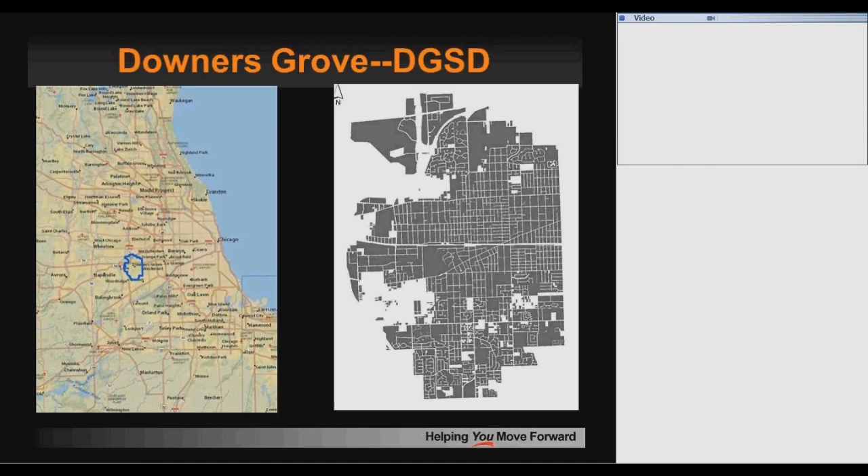The Downers Grove Sanitary District is located about 30 miles west of Chicago. We're a special unit of local government, and our service area covers 20 square miles and serves roughly 80,000 people. Our weather conditions are typical for the Midwest.

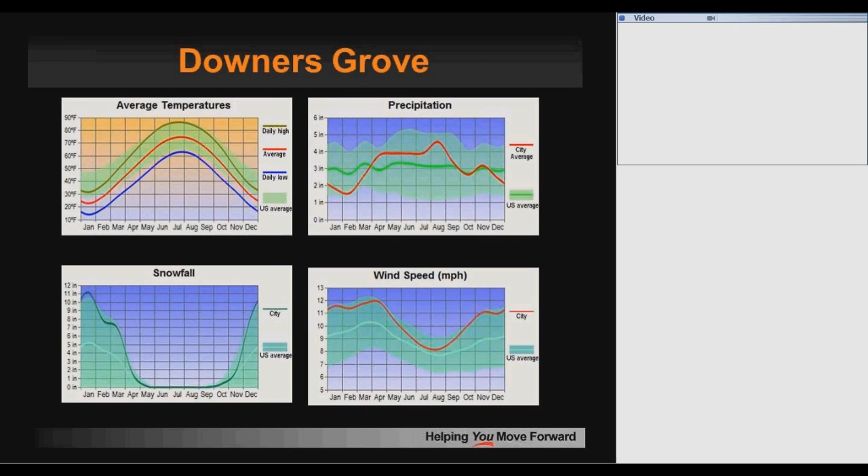The district is responsible for the collection and treatment of wastewater from several different communities. We cover most of Downers Grove as well as a few of the surrounding communities. We do operate our own treatment plant that's designed for 11 million gallons a day.

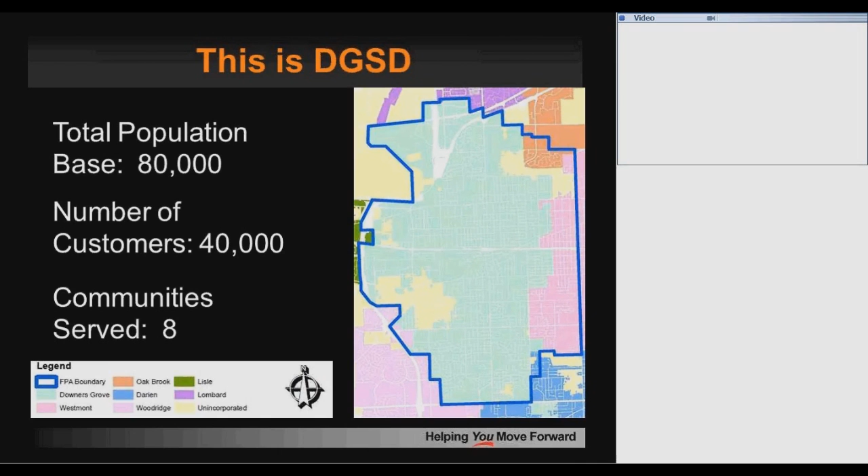The Downers Grove Sanitary District operates and maintains 9 lift stations. We have 252 miles of sewer that is predominantly 8-inch vitrified clay pipe. The system has an average age of 49 to 50 years. The oldest pipes are 109 years old and typically bedded in clay.

We do have an ongoing in-house maintenance program to clean and televise the system. We clean over a quarter of the system annually and televise about 10%.

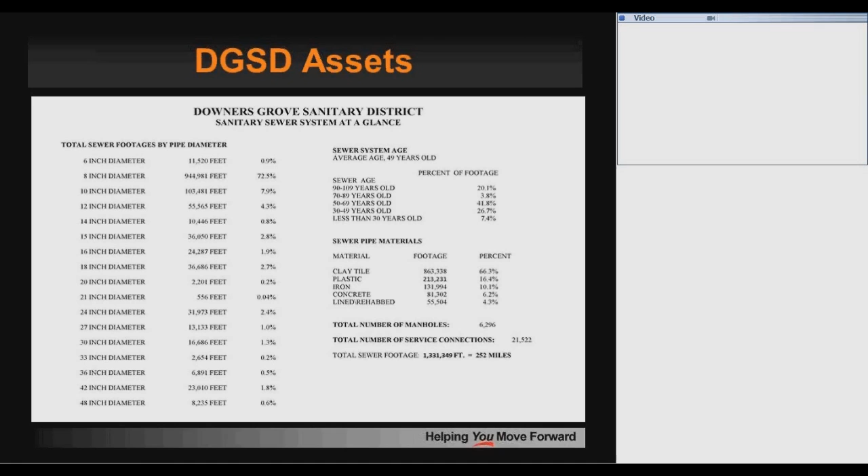As a result of our efforts to upgrade the system and eliminate inflow and infiltration, we have a long history of applying many different technologies in our rehab and replacement programs. In the 80s, just for some background, we did several open cut replacement and lining projects, and they didn't show a lot of improvement as far as the reduction of I&I.

In the 90s and 2000s, we continued with some large-scale rehabilitation projects in an effort to prolong asset life and reduce inflow and infiltration. These projects included grouting that was done on large and small diameter sewers. The metering data, because we do flow meter, the metering data after these projects definitely showed a reduction in I&I.

I think we have a good handle on the extent of I&I because we do have an ongoing flow metering program that we've had in place for several years. So we are able to gauge how well our mitigation efforts are working.

It's because of this metering program and because of our in-house cleaning and televising program that we already had areas identified where there were no significant structural problems and where our flow metering had shown high I&I numbers. So when the ARRA funding came along, we already had a list of several areas that were really good candidates for some preventative maintenance grouting.

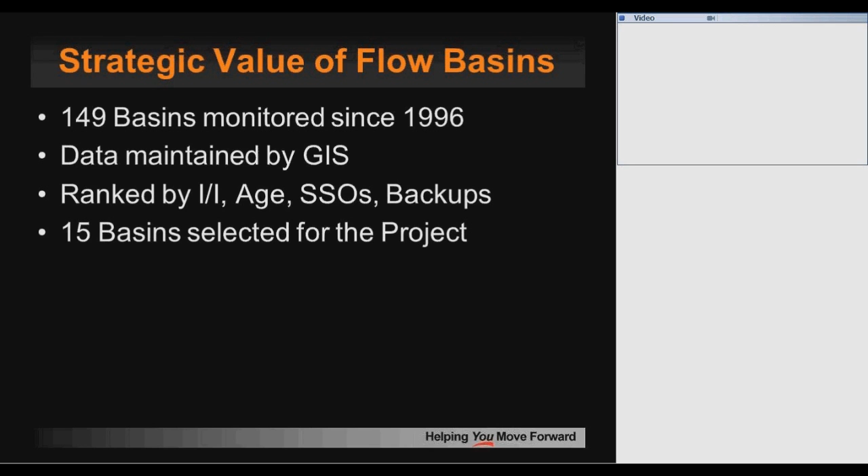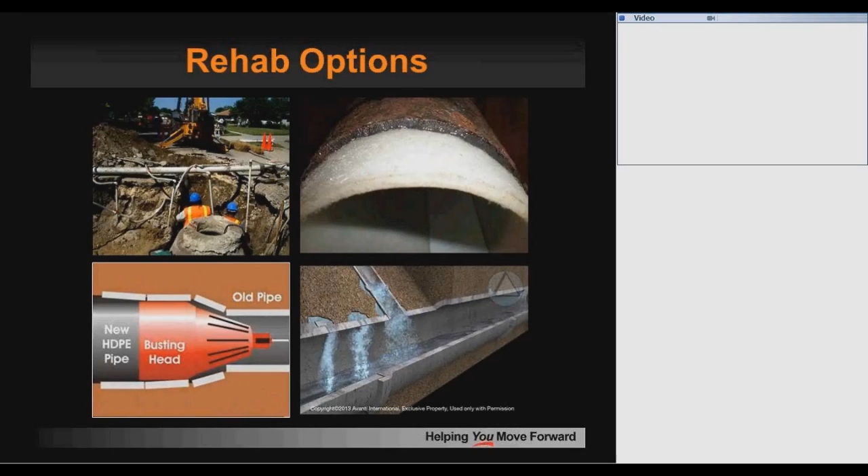Over the years, the district has used a number of rehabilitation methods with varying degrees of success, including open cut replacement, cured in place pipe, pipe bursting, and grouting. For the project we're discussing today, the district and engineers chose chemical grout as the most cost-effective method to achieve the previously discussed goals.

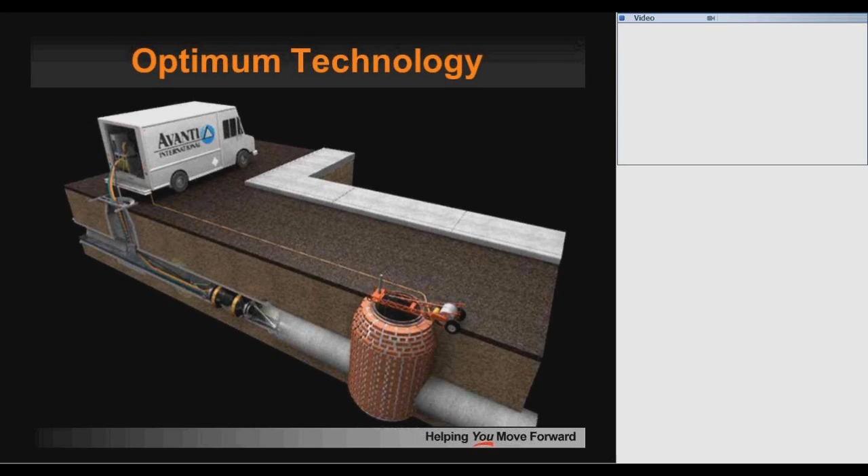The district did a major project in the late 1990s where they sealed a number of joints on a trunk sewer line. We went back 5 years later, and 97% of those joints passed. So we're very confident in the longevity of the pipe sealing and grouting.

Funding for the project was obtained through the Economic Stimulus Package, the American Recovery and Reinvestment Act of 2009. A loan was secured from the Illinois EPA at a rate of 0% interest with a 25% grant. Because of these loan terms, the competition was great, and the project had to be shovel-ready. In addition, the Illinois EPA had to approve grouting as a permanent rehabilitation solution.

I'd like to finish by touching on the specifications for the project. First, the contractor was required to clean and televise the sewers prior to grouting to confirm there were no structural deficiencies. The sewers were then grouted with an acrylamide grout complying with ASTM F2304. The joints were tested after grouting to confirm they held pressure and no longer leaked.

What's unique to this project is that, in addition to testing during the grouting project, the specifications also called for a test after a 3-year warranty period, covering all joints and lateral connections within a test area of approximately 15% of the lineal feet in the original project. If the failure rate in that test area is 5% or more of the joints, an additional equivalent-sized test area will be retested, and that warranty work will happen next spring.

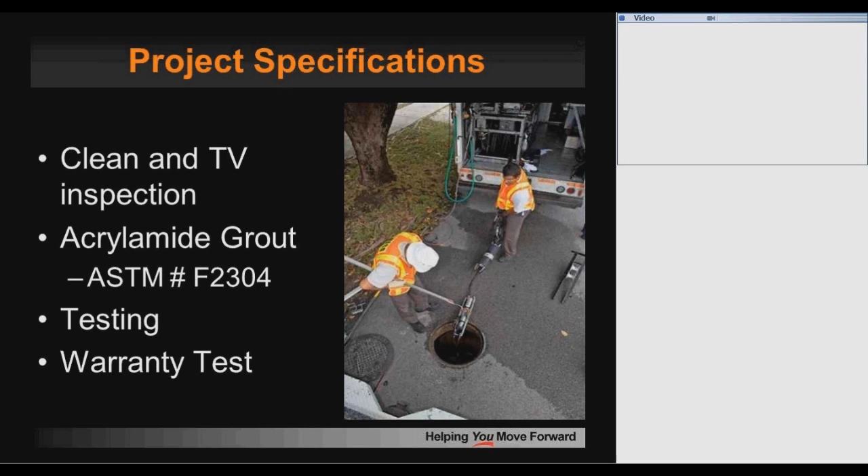So with that, I'd like to turn it over to John from National Power Rodding.

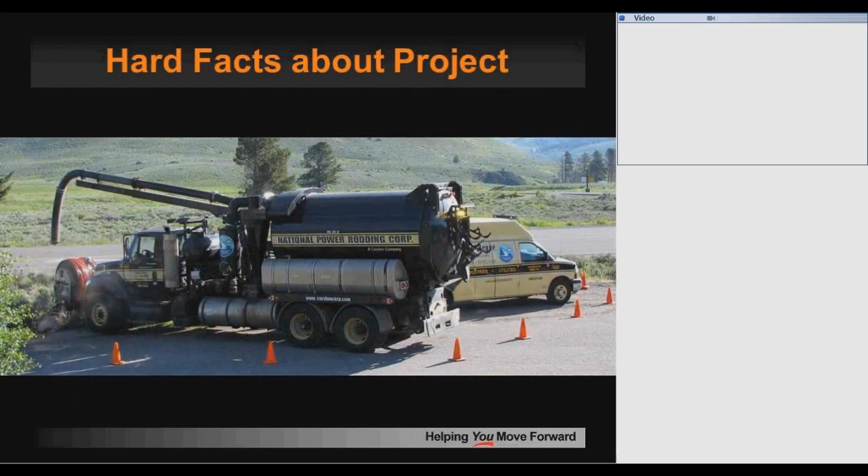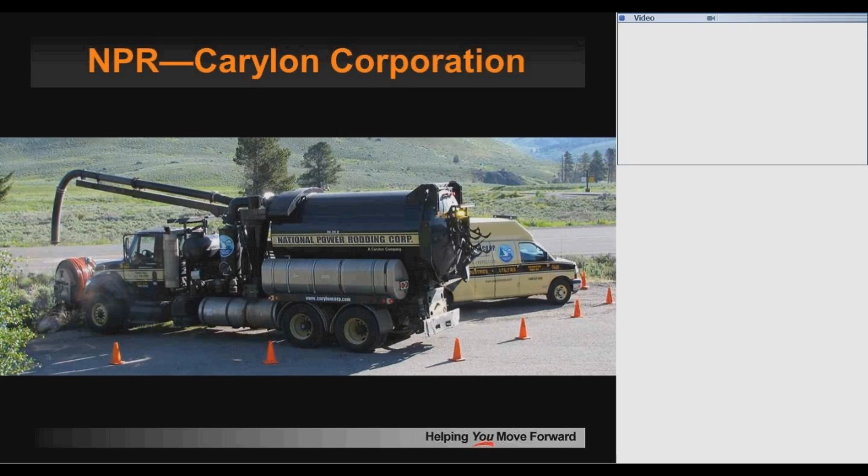Thanks, Derrick. Just a little bit about National Power Rodding. We're part of the Carylon Corporation, headquartered in Chicago and established in 1949. We pioneered the use of chemical grout for sealing sewers. Today, we are still the nation's largest chemical grouting group, serving every state in the U.S.

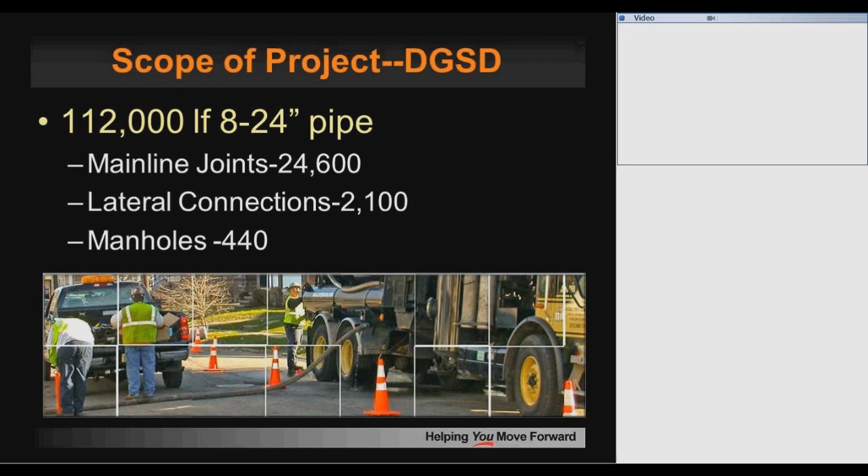The Downers Grove Sanitary District ARRA project covered a total of 112,000 lineal feet in non-lined 8-inch through 24-inch pipe located in 15 separate sanitary basins. There were a total of 24,600 mainline joints tested, 2,100 lateral connections tested, and 440 manholes to be sealed.

The project began in December 2009 and ran consecutively for 8 months, completing in August 2010. We kept a total of 3 grouting crews on site throughout the project, moving systematically from north to south, keeping all 3 crews within the same basin until it was complete. This allowed the district to only need 1 inspector on site to cover all the crews for the length of the entire project.

All of the lines were cleaned and televised prior to grouting. After televising, the crew determined if the lines were in good structural condition and a good candidate for grouting. Also before grouting, we removed all roots, mineral deposits, and any protruding taps.

Of the 24,000 mainline joints tested, we had a failure rate of 25%. Each joint that failed took an average of 3 gallons to seal. With the presence of roots in many of the lines seen in the pre-televising stage, we added a root-killing additive to our grout in order to prevent them from coming back.

We also came across an area that at one time was a swampy area. The pipe had 2-foot joints, and virtually every joint failed. For this area, we added a diatomaceous earth additive to the grout in order to give it a heavier consistency.

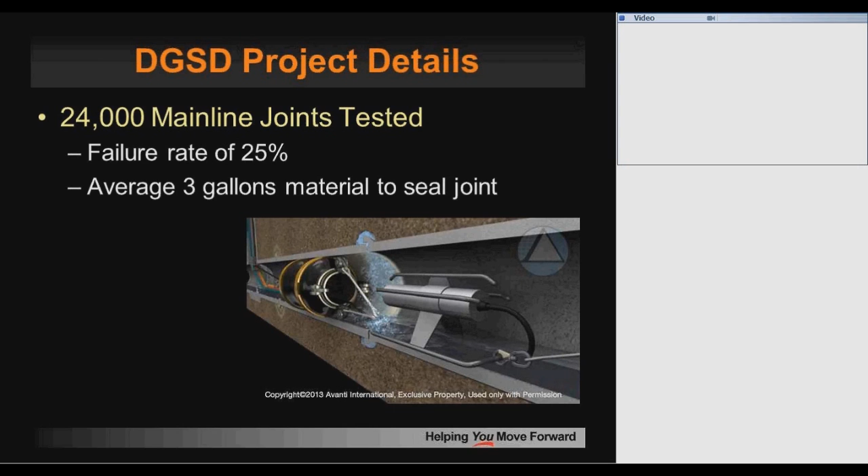Of the 2,100 lateral connections tested, we had a failure rate of 60%. We used a 4-foot sock to test and seal not only the joint at the main line, but also the first 2 to 3 joints of the lateral. Each failed lateral took an average of 3 gallons to seal.

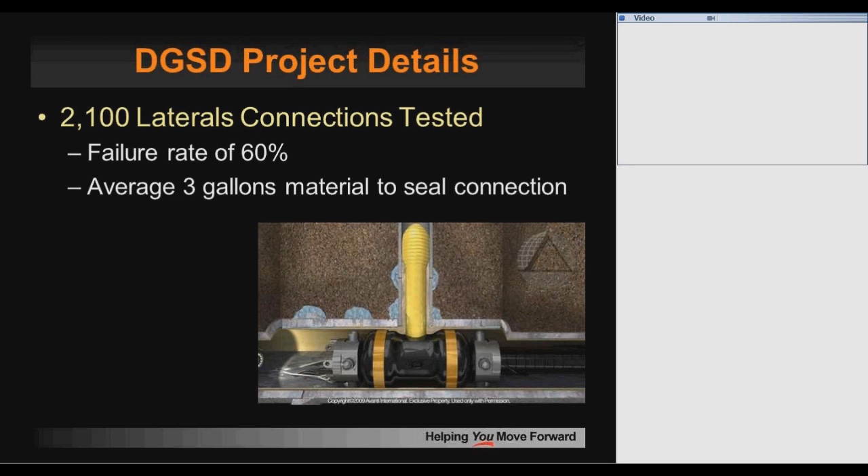The project initially bid having 440 manholes to be sealed by creating a grout curtain around the structure. Once we got into the project, we quickly realized that the ground around the manhole was not ideal for grouting. Because they used a large rock for the backfill, the manholes were taking an extensive amount of grout to create that curtain. Not being very cost effective, we suggested switching to a concrete liner.

There were also 6,200 lineal feet of 24-inch concrete sewer line that had extensive hydrogen sulfide damage. The operators saw this during the pre-televising stage, and after reviewing the video, the engineers and the district agreed that this particular pipe would be better suited to be lined than grouted. It was taken off the project and then later bid as a cured-in-place project.

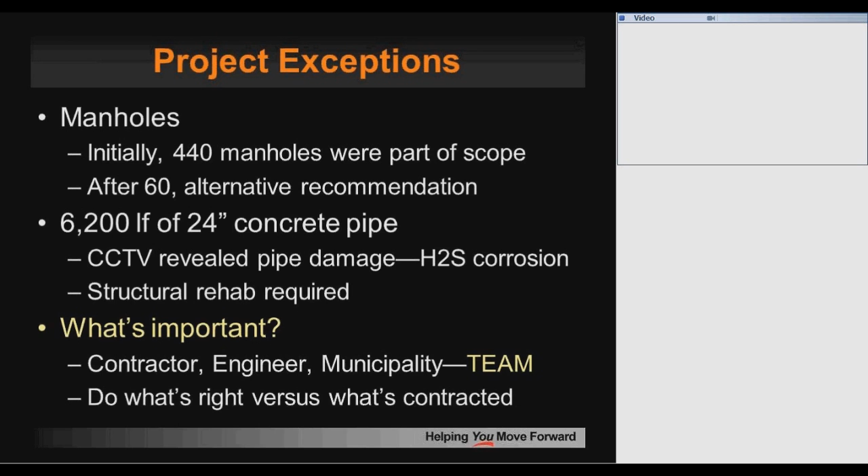The important thing to remember is this: whenever you work on a project, the engineer, the owner, and the contractor should act as one team with one goal, and that is to produce the best results. While the contract may be only set for one item, another solution may be best. Cooperation and teamwork will win every single time. And with that, I'm going to turn it over to Frank.

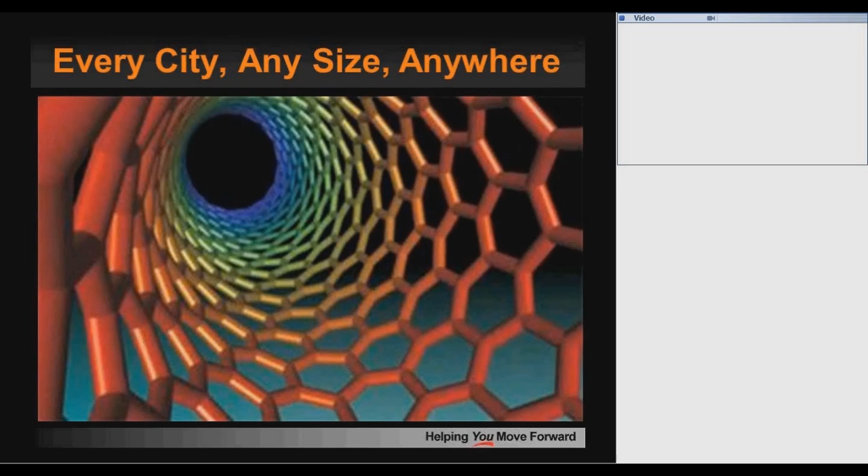Thank you, John. I will be discussing today how the utility and storm trench systems impact sewer infiltration in every city of any size and in every part of the country, and how they are interconnected in some way.

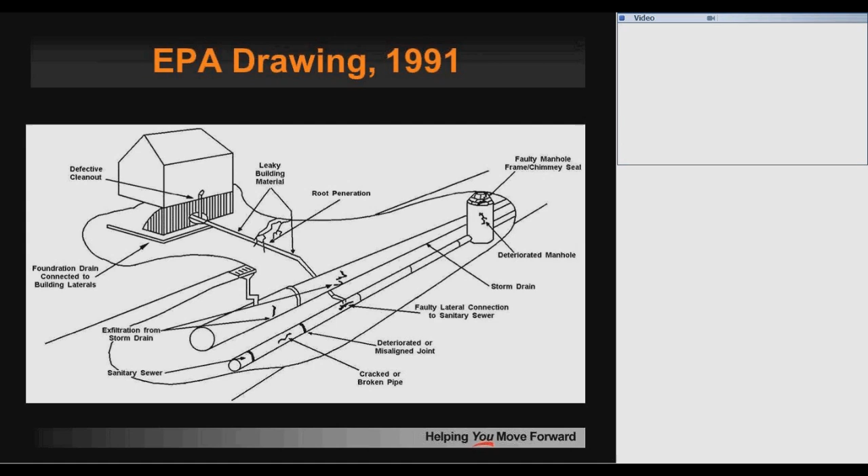What you're seeing now is an EPA drawing that you might have seen before, and it's just showing the complex nature of our underground systems. Here's a more up-to-date cutaway image of what an underground system may look like today. Similar points of infiltration: you have your trench water, you have your faulty manholes, you have your leaking sewer joints, you have root penetration, you have leaking service laterals.

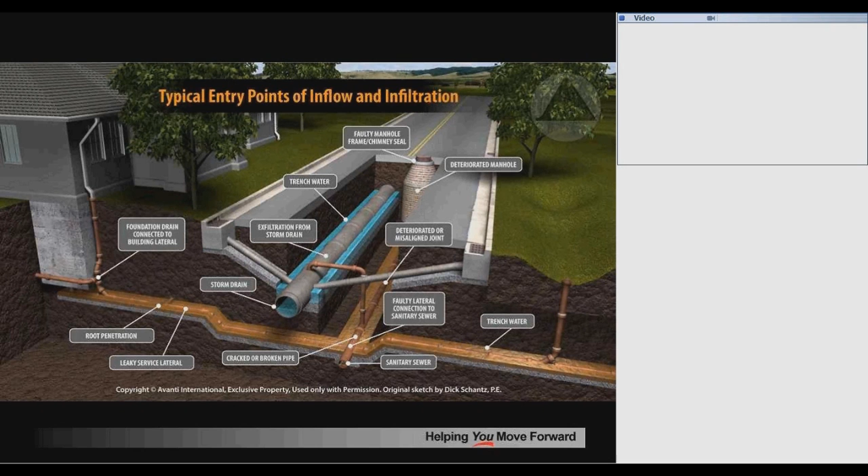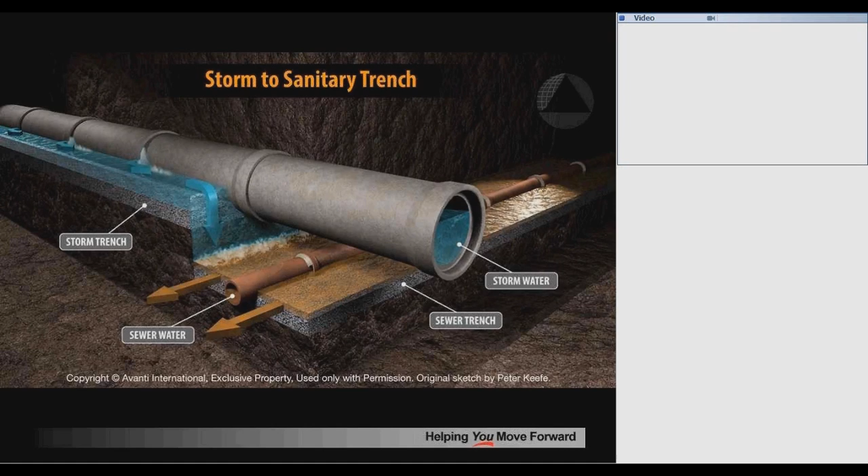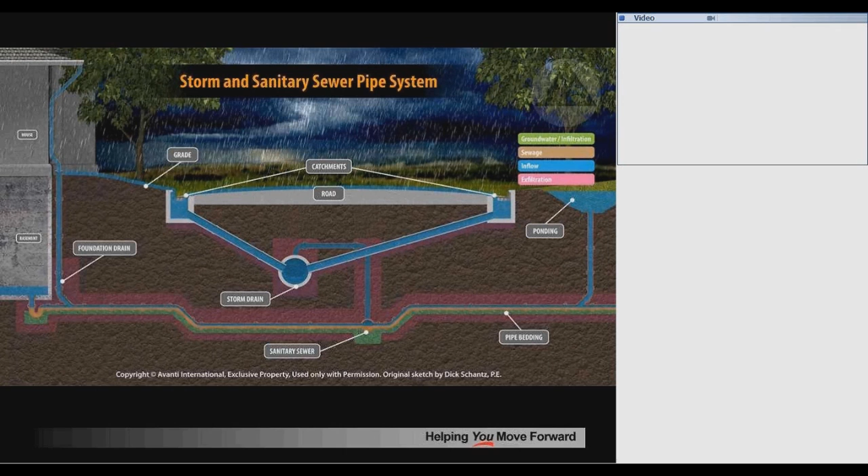Once the water level in the storm and sewer system rises, there's increased water head pressure. The increased water head pressure drives exfiltration from both storm and sanitary systems to open cracks, joints, connections, and manholes. When the system gets surcharged, this begins to break down the bedding soil, which is the fines and sediment that you find during pipe inspection. As more fines are lost, there is a more destabilizing soil environment for the pipe. The pipe begins to move, the pipes begin to lose alignment, and then the joints break open.

Here we have the underground water image. You see the draining down effect. These channels have developed over time, moving water to its lowest level. If the storm continues, both the sanitary pipe and trench system become surcharged. The increased water head pressure just drives more water into the pipe trenches.

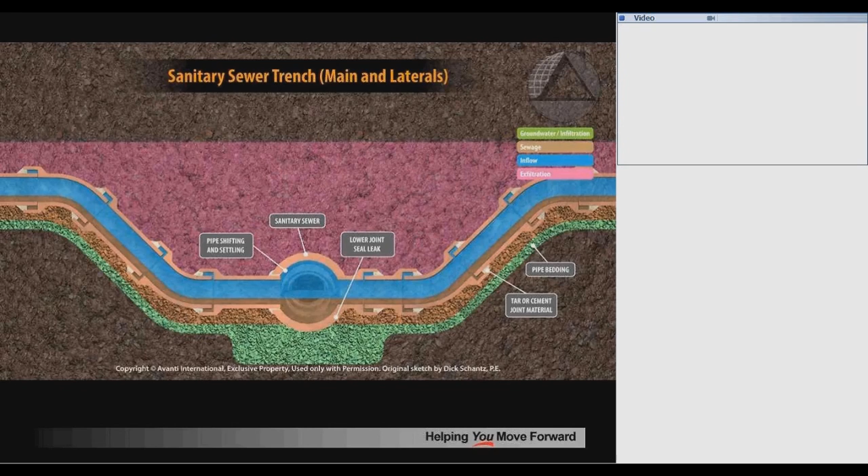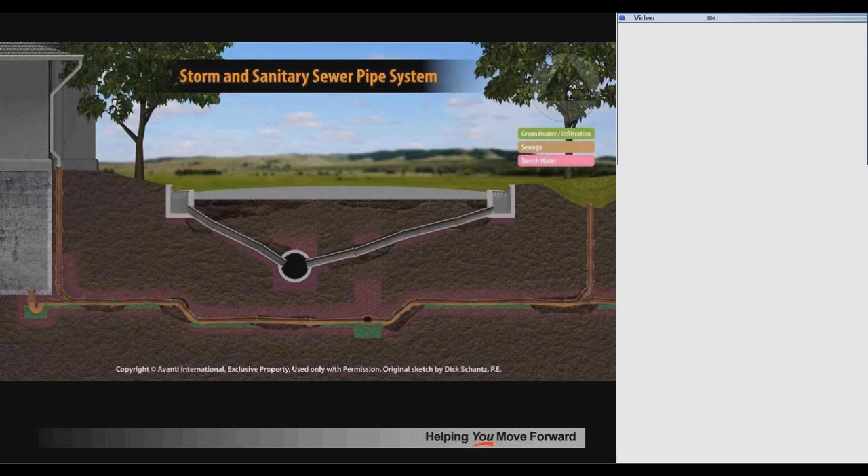So after the storm stops, the water begins to drain from the system, but over time you've lost bedding soil around the pipes and structures. These problems do not occur overnight. It has taken years to develop these underground conditions. From the very first rain event, these underground channels continue to wash away soil. As this continues, more soil and bedding support is removed, further destabilizing your underground structures. And as this scenario worsens, you begin to see how the underground support system of pipes and structures is weakened.

The next slide shows an example of a worst-case scenario, and this is sometimes the first evidence that you have an underground problem. Out of sight, out of mind is a real problem when it comes to our underground structures.

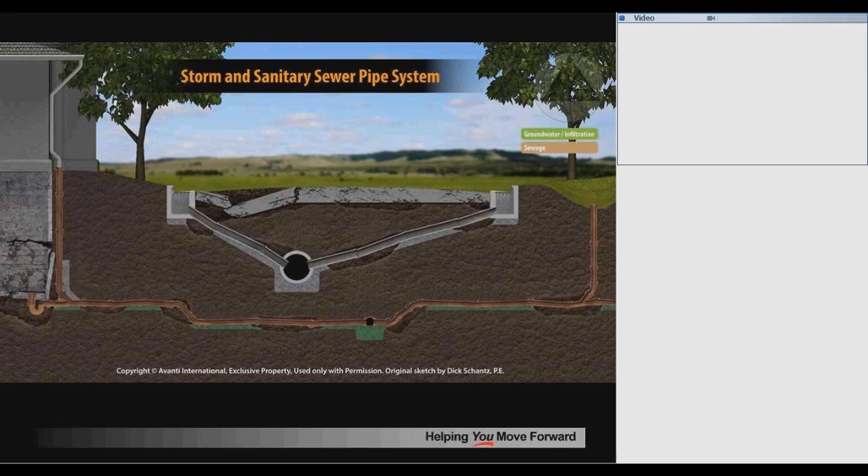We did not create this problem, but we have inherited it. What's our role as engineers, as contractors, as decision makers? We can dig and replace the aged infrastructure, but it's not really feasible for most municipalities. Rehabbing structurally sound pipe is the best option. Today we have a number of choices, but making the correct one is crucial.

You can pipe burst, you can CIPP, you can line. These are all important technologies and all have two things in common: they are all structural repairs and for the most part require a dry environment before being installed. Chemical grouting, the only non-structural repair on this list, is in fact a complementary technology for all these alternatives and the only technology specifically designed to stop infiltration. These other technologies do not stop infiltration.

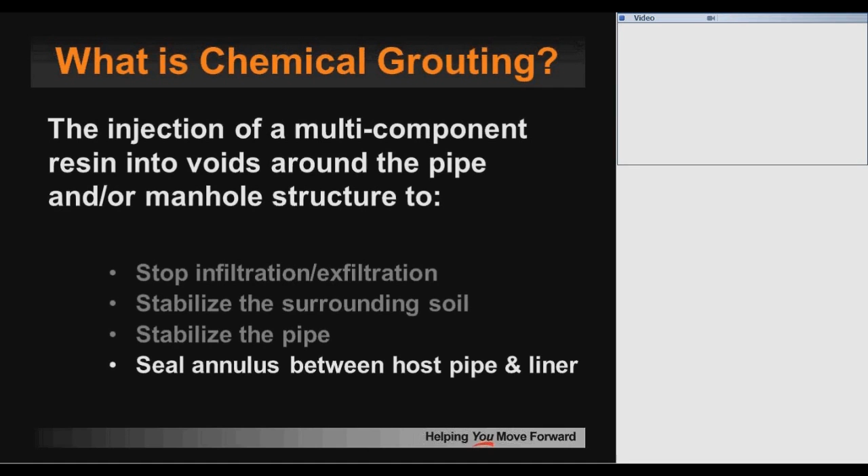Chemical grouting is a pressure injection of a plural component resin into the soil to stop I&I while stabilizing the soil around the structure. If there is one image that you take from this presentation, it is the various stages of pipe decay. At stage 1 and 2, chemical grout can extend the life of our system. But at stage 3, we're faced with making structural repairs, which can be anywhere between 3 and 10 times the cost of proactively maintaining and sealing our entire system with chemical grout to stop I&I.

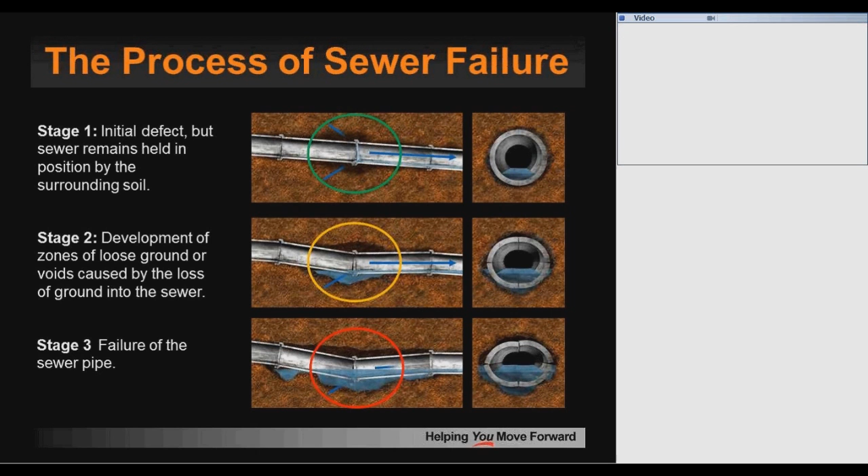And with that, I'll hand off to Robert.

Thank you. I already have our first question here, and I think it's probably best to pass that off to John Manijak. Possibly Bob or Derrick may want to pitch in on this.

And the question is, was the cost of the warranty requirement inclusive to grouting costs or a separate bid item? And if so, how much did the additional warranty testing cost?

Well, it was an additional item. It was an option that was available to the district if they wanted us to come back and retest. I know that the price to retest was fairly low compared to the rest of the project itself. I don't know if Bob knew the number, but the testing itself can be worked into the original pricing, or it can be a separate item.

I don't remember the amount, John. I don't recall it, but I know that it was a separate line item at a set amount, and it's based on the passing of the percentage that Derrick mentioned. And if that's not achieved, then it goes to additional testing, I believe, for no additional cost until you achieve, I think it was 5%, less than 5% failure.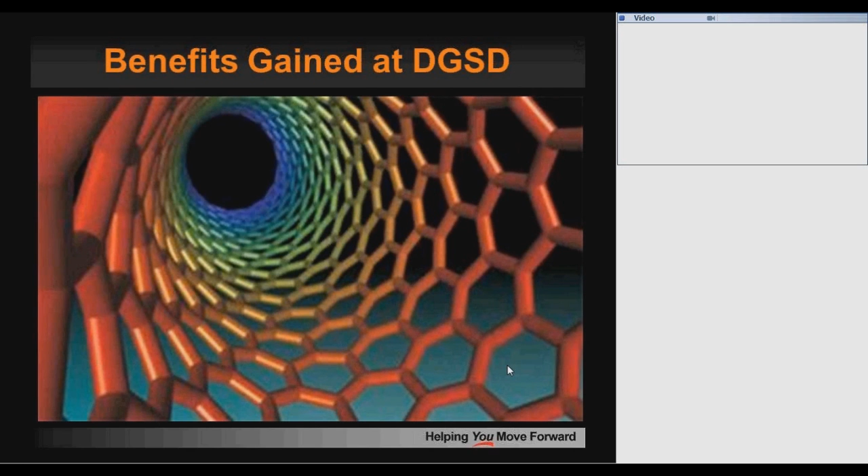And now we'll move on to Derrick, who's going to talk about benefits. Yeah, thanks, Robert. I would just like to take a couple minutes and discuss the benefits of the project at Downers Grove Sanitary District. So first, the question that probably everyone has is, how much I&I was reduced by the grouting project? As mentioned, the district has extensive flow monitoring data over the past 15 years, and using the post-rehabilitation flow meter data, we can confidently say that the peak flows were reduced by an average of 21%.

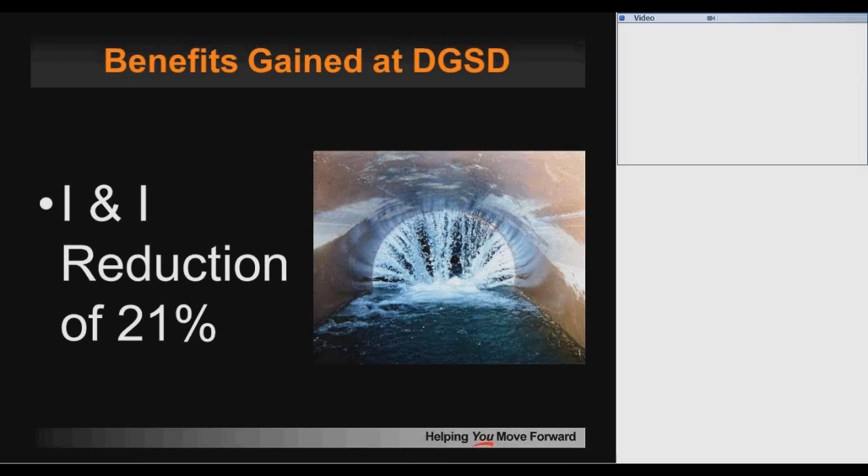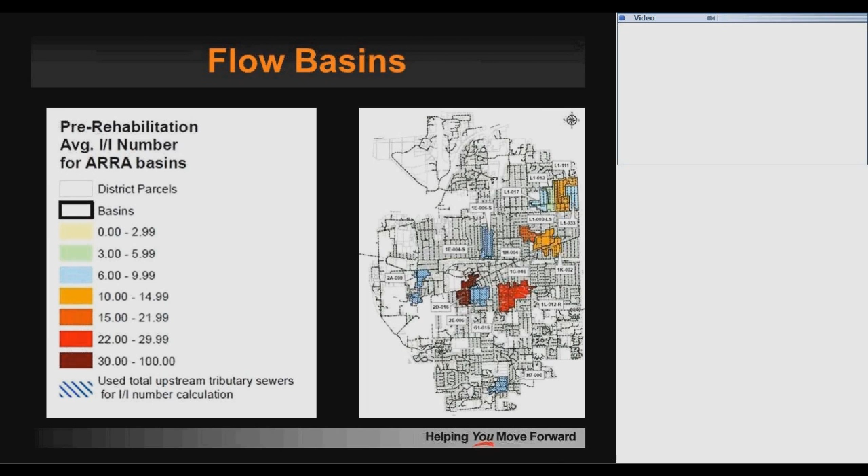So the next figure here is that map that we saw earlier. As a refresher, it shows the severity of I&I in each basin, with the darker shaded basins receiving more I&I than the lighter shaded basins. The data prior to rehabilitation is shown on this figure.

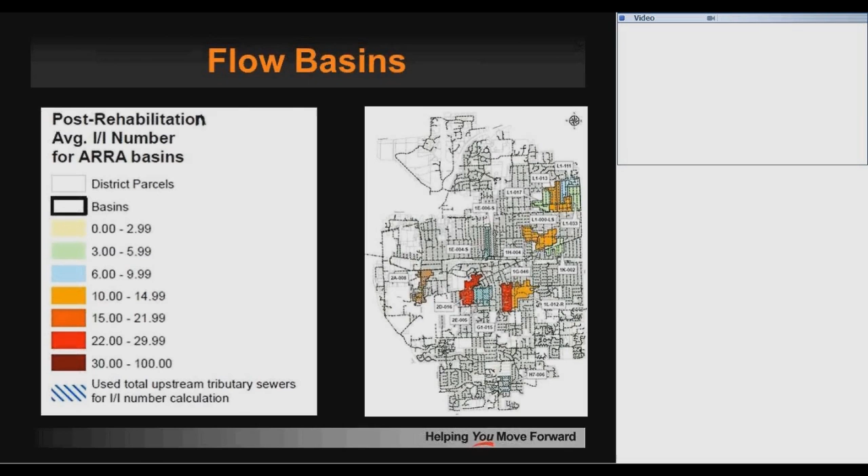The data after grouting is shown on the next figure. These maps give a nice visual display of the reduction in I&I, and you can see the change in color before and after the grouting project.

In graphical format, we are showing the pre-rehabilitation I&I in blue, the post-rehabilitation I&I in red. On the y-axis is the I&I number, which again is the gallons per minute per lineal foot of pipe per inch of rainfall in each basin. The x-axis lists the 16 basins that were subject to the rehabilitation project.

On average, the reduction was 21%. In the several basins that did not experience this amount of I&I reduction, the district is performing house inspections and finding that much of the I&I in these basins is actually on private property.

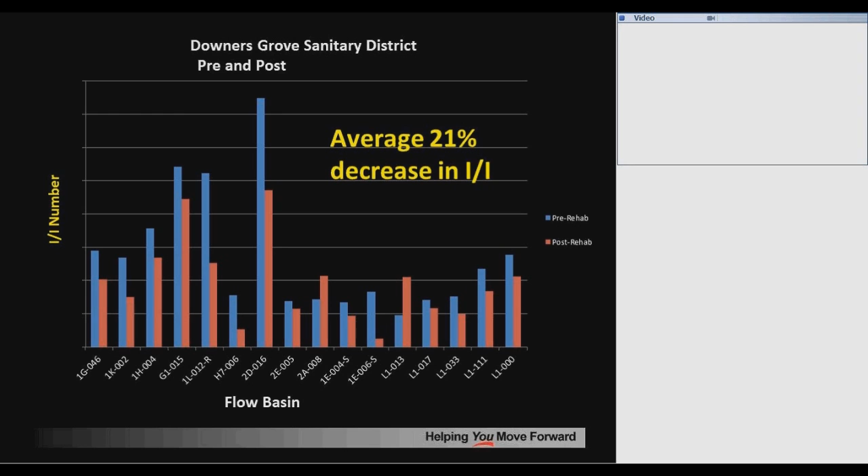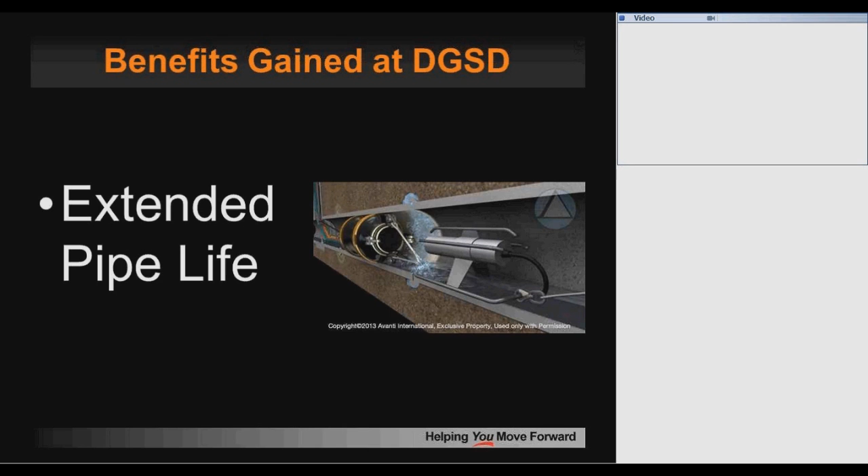Again, the benefits of the project include extending the life of the clay pipe, which was in good overall condition but had joint leakage and root intrusion. The benefit of inhibiting the roots was decreased maintenance activities and freeing up crews to perform other tasks, and finally, to reduce inflow and infiltration.

We also looked at the project costs. The $3 million project in Downers Grove Sanitary District equates to about $220 per gallon per minute of I&I removed on a peak flow basis. This I&I reduction avoids having to construct trunk sewers, pump stations, and treatment tanks for the excess flow, which would cost in the ballpark of 10 times the amount spent on grouting, or about $30 million. So in our minds, this was a very successful project.

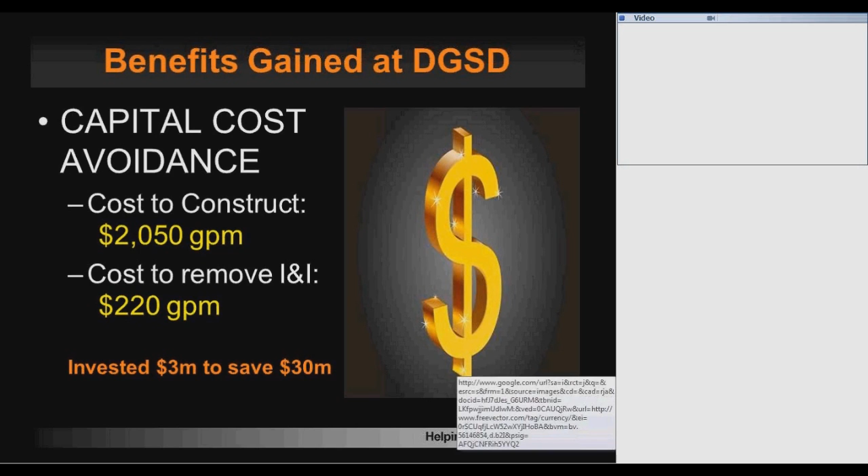Thanks, Derrick. The district does anticipate a number of benefits from this project because the flow metering has already indicated that reduction. We anticipate the stabilization of the soils around the pipe, that they'll extend the life of that pipe, and also the reduction in root growth is going to help with maintenance because it'll make the need for increased frequency of root cutting less likely in the future.

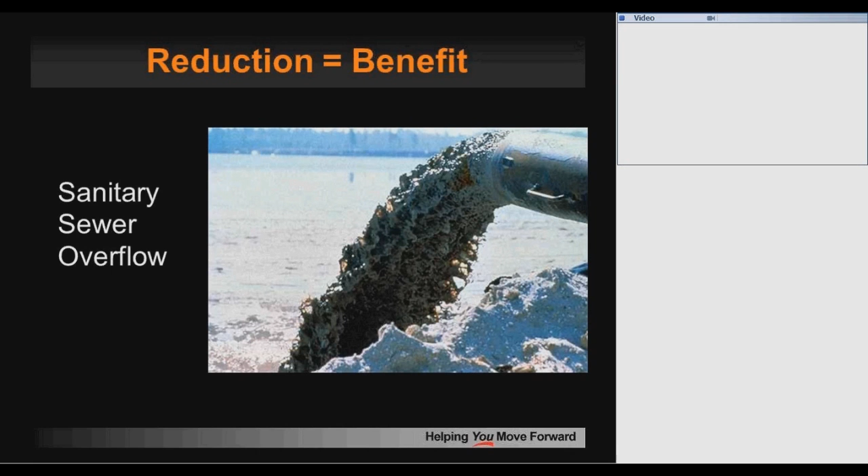The long-term environmental benefits of the I&I removal, I think, will include increased protection against mainline surcharges that would cause manhole overflows, as well as the elimination of backups into basements.

So we've developed several programs that eliminate I&I on private property and benefit the customers as well. We have a repair assistance program that allows us to do repairs on private property for homeowners having sewer backup issues, and a program that offers cost sharing to homeowners that want to upgrade to an overhead sewer.

These proactive programs result in improved customer relations, and all of the programs allow us to assist customers while also identifying and eliminating private property I&I. We believe that the benefit of being proactive is that it enables you to get ahead of a number of the maintenance issues so that you're in a better position to create these innovative programs to benefit your system and your customers. This is a representation of if you're not being proactive—you're just treading water.

The main program we have for reducing I&I is our private property I&I removal program. It's a program that we developed along with Baxter Woodman, and we've been able to totally rehabilitate a targeted flow metering basin. In the last basin that we did, we used a combination of open cut replacement and grouting to address the issues in the public main lines.

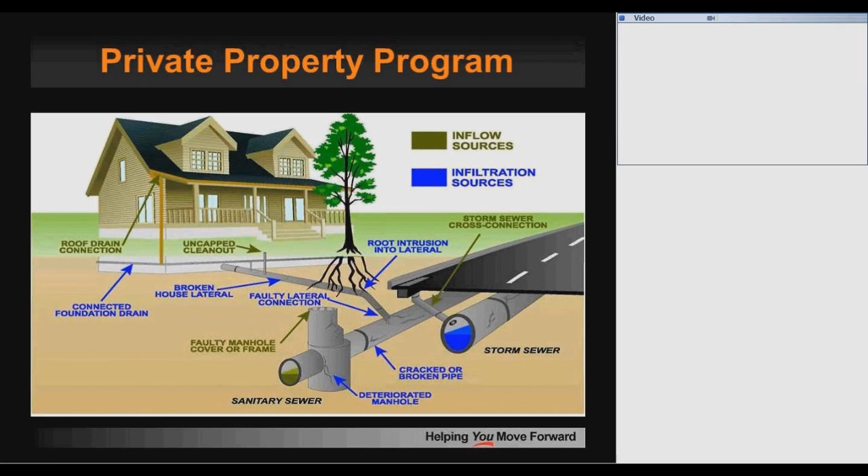The next step for Downers Grove Sanitary District—we're continuing with our private property I&I removal in a couple of new target basins, starting our investigation. And for me personally, as the sewer system maintenance supervisor, I would like to start an ongoing in-house maintenance grouting program that would routinely move through the system like we do with cleaning and televising, testing and sealing joints.

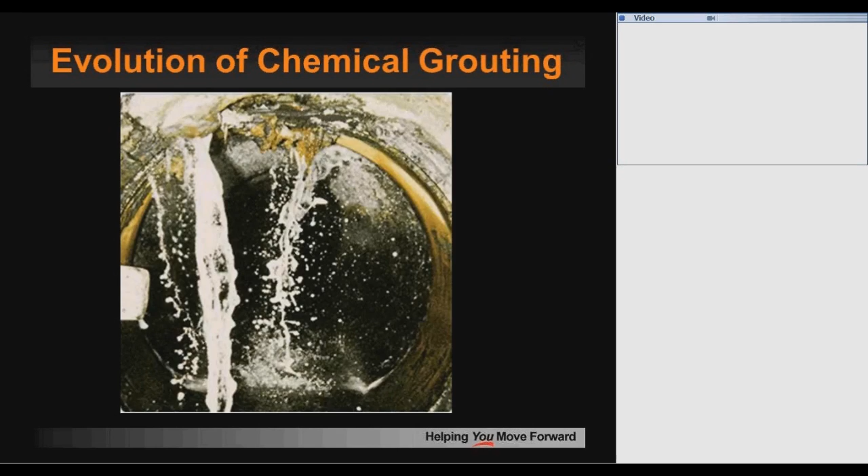It's not in the equipment, and it's not in the chemicals, and it's not in the way in which we test or we seal. Where I see the most change in chemical grouting is in the acceptance at the engineering level. It's in the thoughts of the decision makers and the engineers.

Given today's decreasing budgets and the increasing pressure to eliminate infiltration and sanitary sewer overflows, chemical grout has a perfect fit. It is the only technology specifically designed to eliminate infiltration.

Over the years, chemical grout has gained the reputation of being a bandage. This cannot be further from the truth.

During the 1990s, chemical grout, specifically acrylamide grout, was tested extensively by the Department of Energy and given a half-life of 362 years. At 362 years, chemical grout has the longest lifespan of any rehab product used in today's market. That is why we say when we seal a joint or a structure, we seal it permanently.

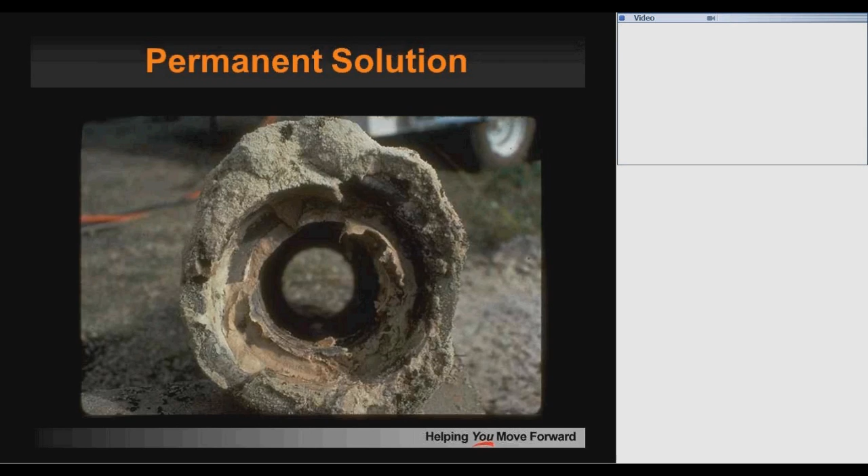As I said earlier, we tested 2,100 laterals using an average of 3 gallons of chemical grout in unlined pipe. We've seen that cured-in-place pipe, while being a very good structural product, is not a watertight product.

The Army Corps of Engineers published that liners need to be sealed at both the lateral connections and at the manholes. This is due to the annular space that is present in cured-in-place pipe.

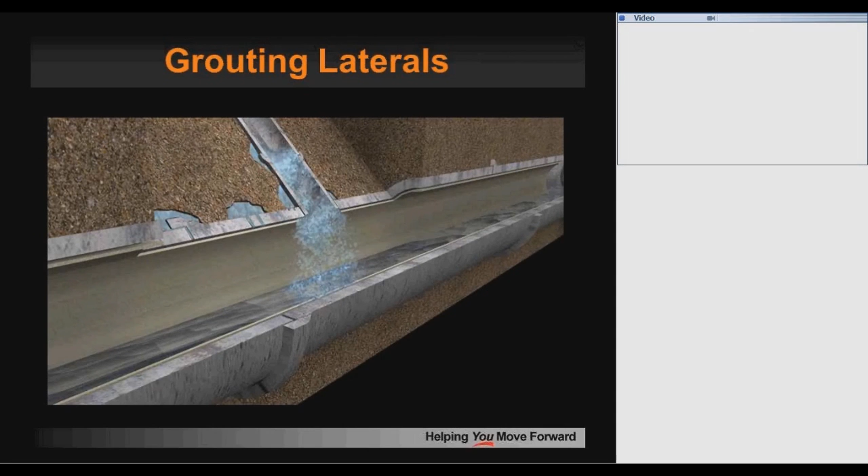Now, here we have a pipe that represents a pipe prior to lining, showing infiltration at the joints and at the lateral connections.

When we line a pipe, we put a new piece of pipe in place from manhole to manhole. But what happens next is that we have to cut a hole in our newly installed seamless pipe.

What's happening is that the joints and the fractures are still leaking, and the infiltration is finding its way back into the main line through the annular gap.

Chemical grout works well with lining. Before the chemical gels, it has the consistency of water, allowing it to not only penetrate the joints at the lateral connection, but also to be injected into the annular space, sealing the liner at the lateral connection.

I've said that we used an average of 3 gallons of grout to seal unlined pipe. It takes an average of 5 gallons to seal a lateral in lined pipe. Those extra gallons are going into that gap to seal the liner.

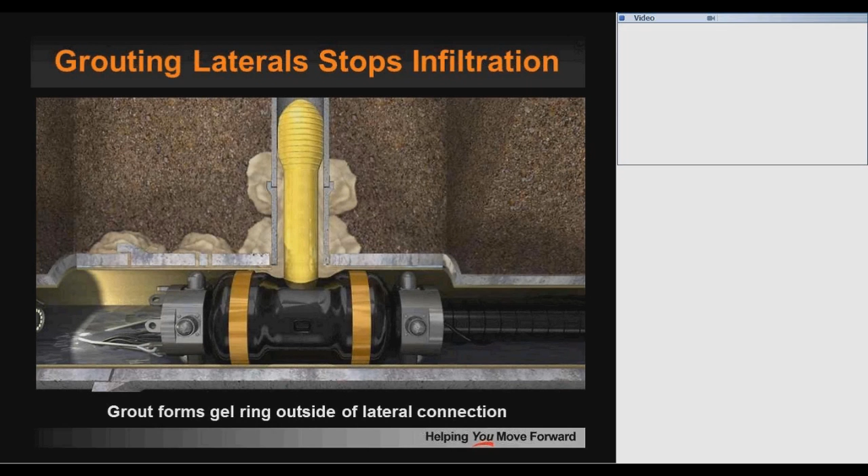Not only do you have the added cost of treating the groundwater at the plant, you are also losing the substrates that are holding your pipe in place.

Over time, infiltration weakens pipes. It allows them to shift and break, costing you 3 to 10 times more to repair than if you had taken the preventative measures in the first place.

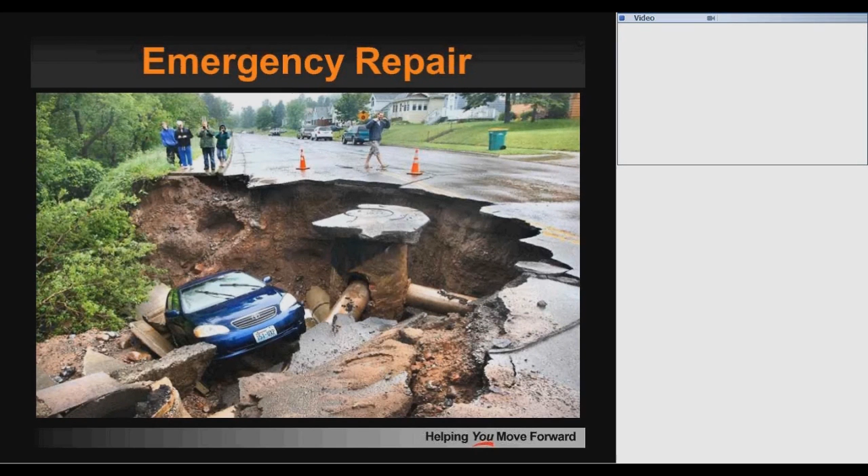Taking a proactive approach will save you money. It will allow you to better budget your finances by eliminating future problems now.

If you have a pipe with a lot of cracks and fractures, then you should line the pipe. But if you have a good pipe, you can grout it and prevent that damage from happening in the first place. The key is not sitting back and waiting for something to happen.

That's reactive maintenance. Being proactive means getting to know your system, analyzing your pipes, fixing the immediate problems, and preventing future ones from ever happening. Grouting plays a large role in being proactive.

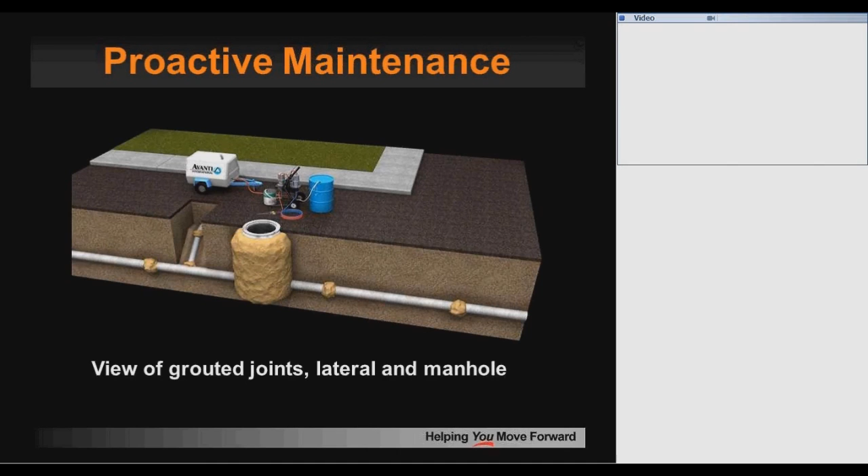NASSCO and ICGA have published a set of specifications that will help you correctly put together a successful grouting project. In these documents, you will find the proper ways to test the equipment, what to look for when the joints are being tested, and the proper amount of grout needed to seal. Everyone here today will receive these documents as a takeaway.

We teach our operators that they are there to seal that pipe, not just to pass a pressure test. Let me say it one more time. As a contractor or an inspector, your goal is to seal that pipe.

Following the guidelines, working with the right contractor, being flexible, working as a team, all these things play a big part in making your project successful.

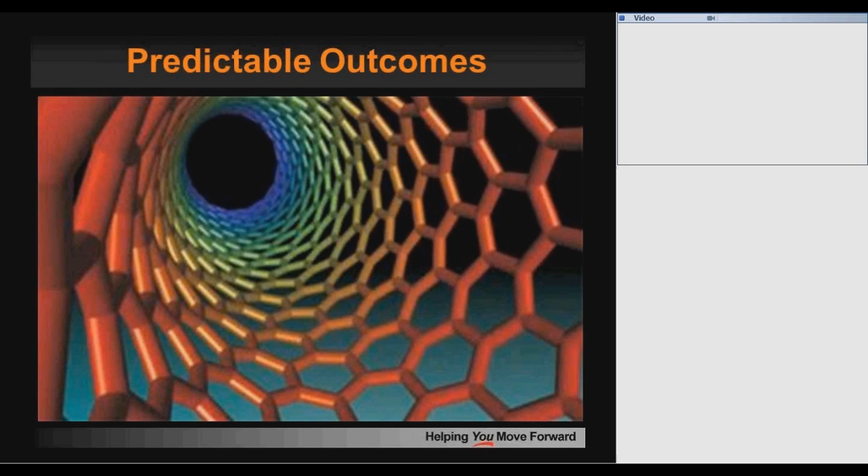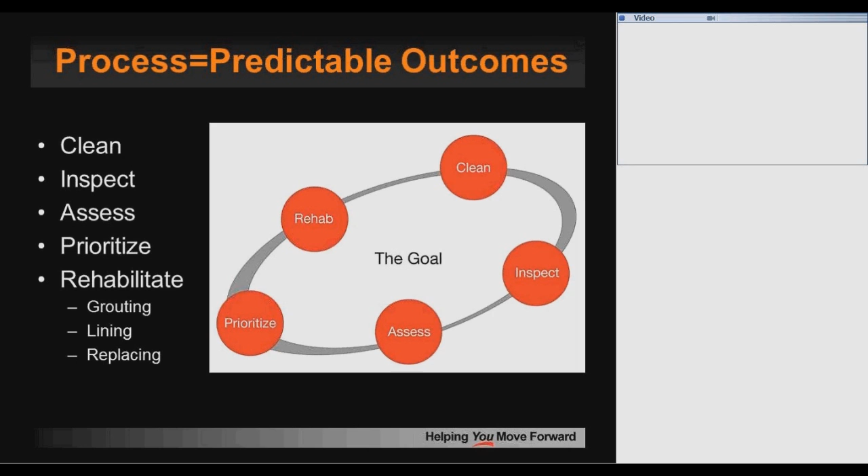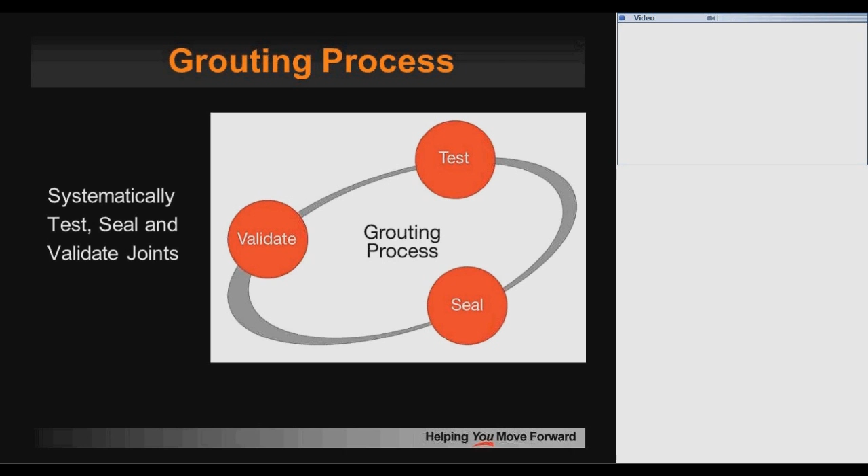Thank you, John. In this next section, we're going to talk about the process. Our process must be where we clean the pipe, perform a thorough inspection of the pipe joints and connections, assess the data, and make it a priority to determine a plan of action to rehabilitate by grouting, lining, or replacing the pipe. If you choose grouting, then having a maintenance grouting program in place to visually inspect, test, and seal the joints from leaking is a proactive approach.

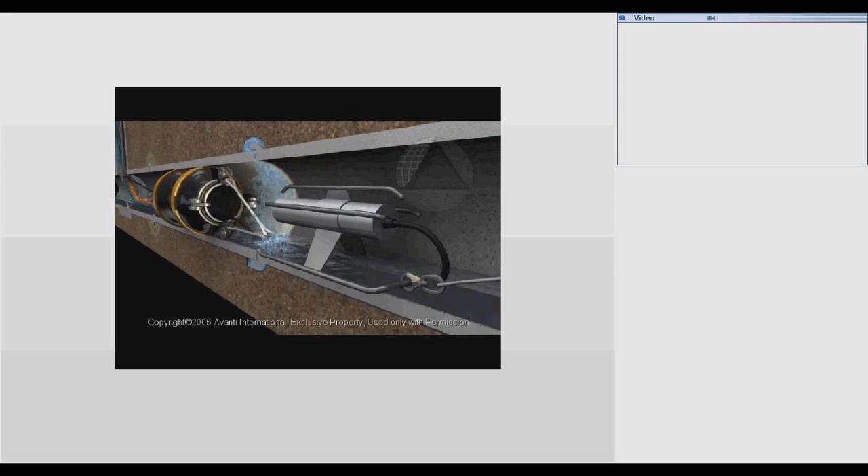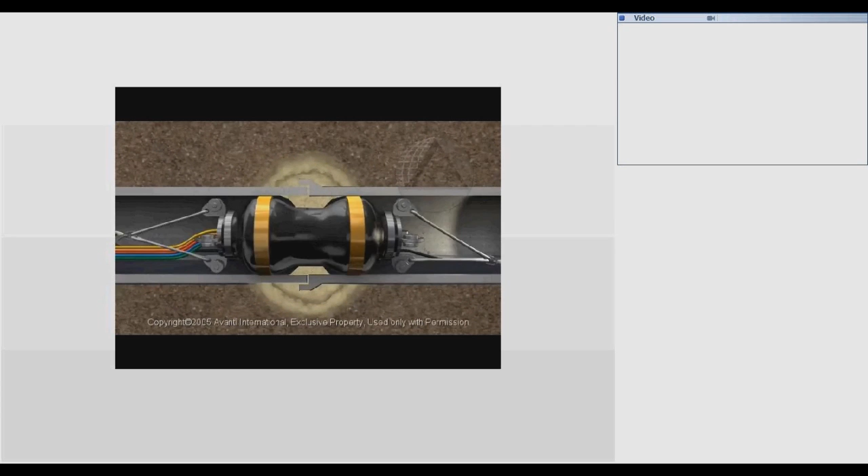All right, so here we see a leaking pipe joint. We see the camera is in position, and the grout operator is going to use that camera to position the packer on the joint that's leaking. The bladders are inflated on either end of the joint, sealing that area, and then chemical grout is pressure injected through that joint out into the surrounding soil, and that's where the grout collar and seal takes place.

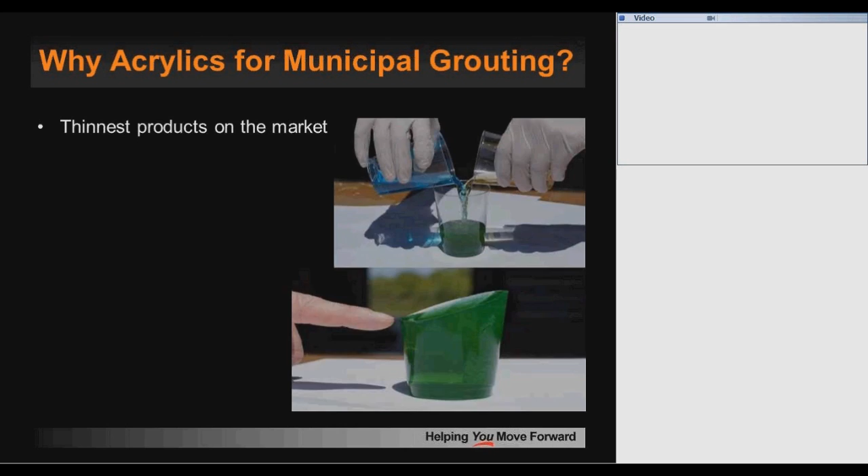Municipalities use different types of chemical grouts depending on the application. The acrylic family of grouts are preferred by cities and municipalities for sealing pipe joints, laterals, and manholes. The acrylic materials are preferred due to the low viscosity of the materials, that they are a true solution grout with no suspended solids, that you can get repeatable set times, and adjustable gel strength.

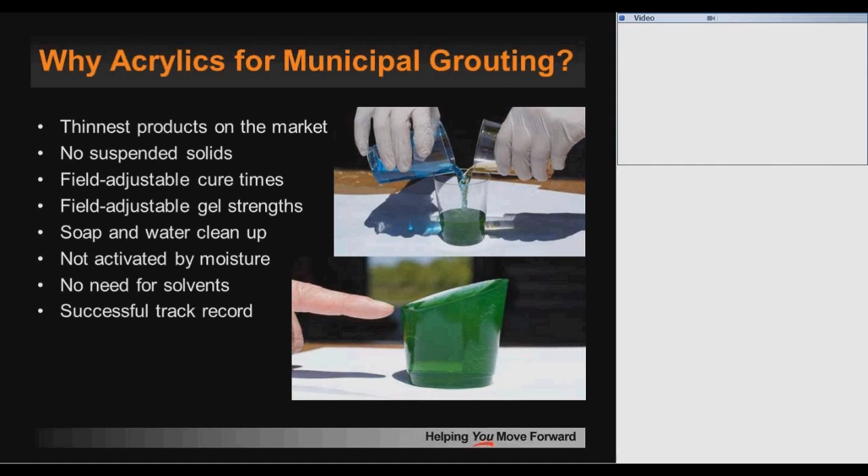In the early stages, grouting was said to be more of an intuition, a feeling, if you will. Today's grouters in the industry are leaning more heavily towards science.

So in summary, here's what we've heard today. In past webinars, Avanti has featured very large communities and sewer districts, but today we wanted to focus on an average-sized system with typical problems, resources, and funding options. That's what Downers Grove Sanitary District represents, and they justified being proactive on maintenance to avoid more costly structural repairs.

We heard how the engineering firm segmented the district into 149 basins to better assess and monitor with flow meters and provided measured results after the fact. From the contractor, the scope of the project was detailed and exceptions were noted requiring cooperation between the engineer, the district, and the contractor.

Understanding the natural hydraulics within the sewer trench gives us insight on solving the problem through a systematic process and holistic approach to sealing the entire system. That's how you defeat infiltration and reward the rate-paying community with less cost, less fees, and far less disruption to the caliber of service they deserve and expect.